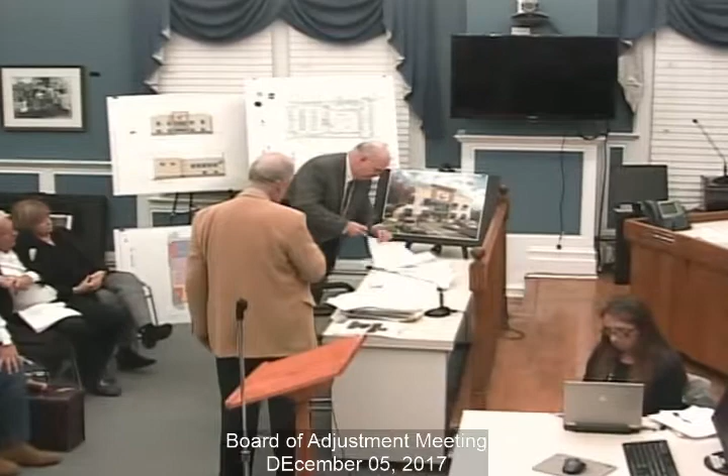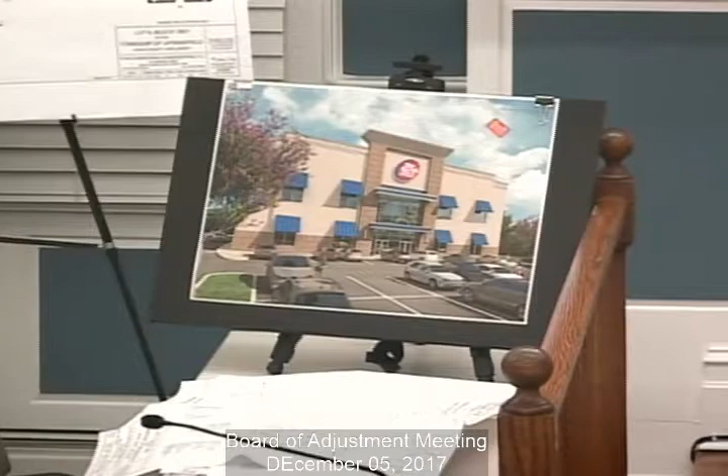The site was previously developed as a motel, and the motel's subsequently been razed, between the previous testimony at the other meetings. So those variances that were existing, there were several that were eliminated.

The variance that is required is lot coverage. It would be 88.3% proposed, where 70% is allowed. I think that was 60, based on testimony, Mr. Michaels, they changed that ordinance. Wasn't that 63%? I'm not quite sure. I believe that may have been, all right, but go ahead, continue.

And there's also a variance for building height that would be required. Okay, could you describe and explain the drainage for the site?

The site generally slopes in a southerly direction, and presently the flow from the site goes across the site and then drains onto the adjacent property on Lot 8. Lot 10 acts as a diversion that diverts the water onto Lot 8. And that general pattern would be maintained, and it would be enhanced through drainage pipes that are around the parking lot.

But the primary drainage is going to be through pervious pavement. This is a pavement that allows the stormwater to pass through the pavement into the soil, which is rather sandy. It's almost like there's nothing there, it just lets the water run right into the soil. The pervious pavement also filters out any particulate matter that gets washed into the parking lot, and then periodically the site would have to be vacuumed, which would remove the particulate matter from the site.

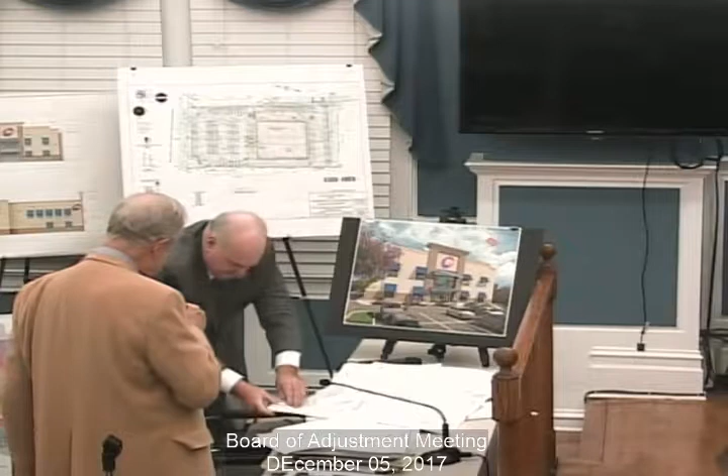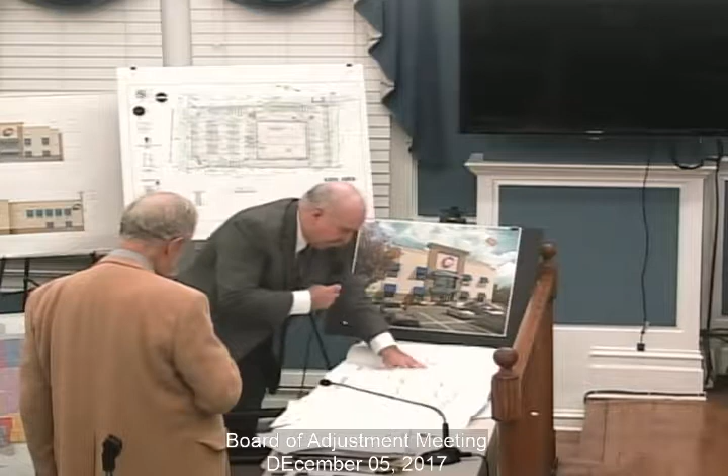The lighting and landscaping plans are sheet 5 of the plan sets. We're proposing 18-foot high LED lights throughout the parking lot. There's some quadruple lights near the first bay in the parking, which is near inlet 8 and near inlet 12.

And then there's also some other lights around the perimeter of the parking in the islands on the west and on the east. And there's additional lights around the perimeter of the parking to the back and around the sides.

The engineer or the planner, I'm not sure which, has asked for additional lighting west of the building in this driveway, and we agreed at the last meeting that we would do that. And they also asked for a shield on the lights adjacent to Route 22, and we've agreed to do that also.

Okay, and the circulation of the vehicles, I believe you already went through that? I did briefly, yes, sir. Do you have anything to add as far as circulation is concerned? No. Okay, how about... oh, they did ask for, in the comments, turning templates for fire access, and we agreed that we would do that and provide that. Very well, subsequently.

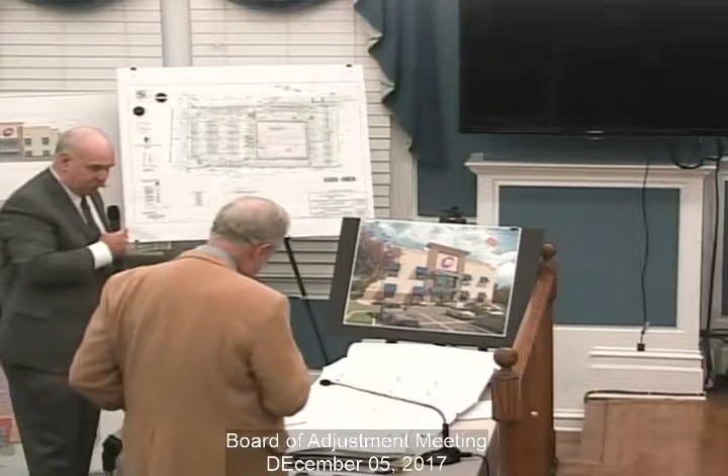Could you describe the proposed landscaping for the site? We're proposing some landscaping in the islands, which would be the dwarf junipers, and there would additionally be some dogwoods that we're proposing around the site, and we're also proposing some deer-resistant arborvitae along the back. There would be 9 Kousa dogwoods that we would be proposing around the site, 10 of the deer-resistant arborvitaes, and 80 dwarf junipers. Again, there was a comment asking us to provide some more landscaping, and we've agreed to do that.

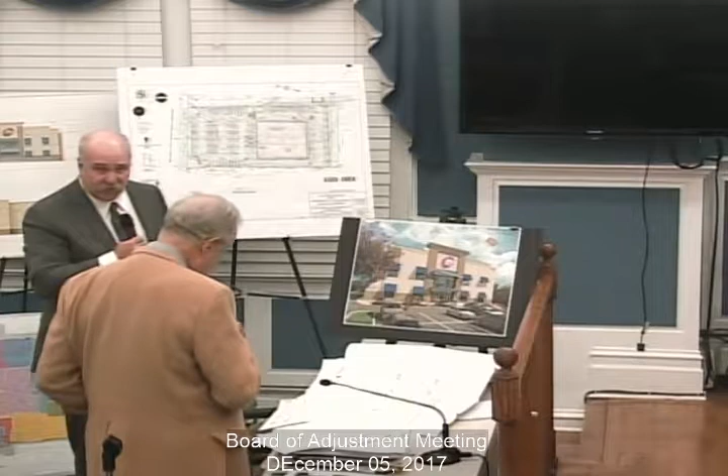Right, and could you describe the signage for the site? I think I'd like to defer that to the architect. Very well, the site sign. There's going to be directional signs around the property, and the one-way signs and the do not enter signs would be reversed to be appropriate with the new circulation pattern. Also, the traffic arrows would be altered to reflect the new traffic circulation pattern.

Do you have any additional comments you would like to add? No, I don't. That's the engineer's testimony, Mr. Chairman.

Okay, yes. Okay, that's fine. Does anybody have any questions for the engineer?

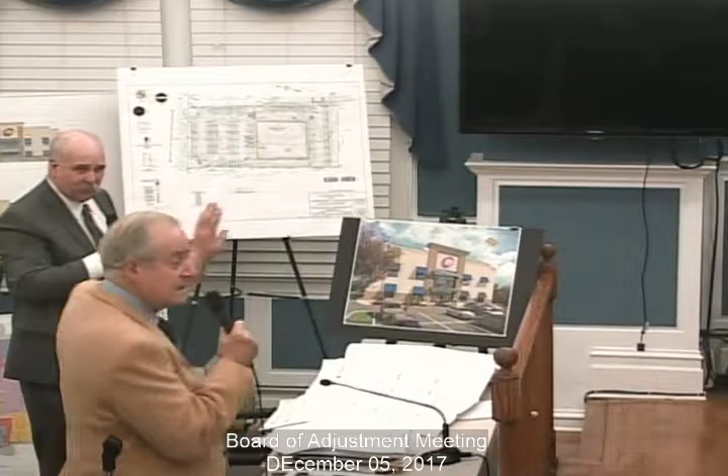I just have a technical question for our board attorney. When we've granted a variance for Lot 9 based on certain parking, as part of this application, are we able to change the parking by eliminating parking spots? How does that work? Mr. Hochstein: that's Lot 8, not Lot 9, the adjacent property. I did file an application for amended preliminary and final site plan application to take care of the changes. That will include that. Anything else?

Maybe. Are there any other questions from the board for the engineer? We're going to reserve the opportunity for anybody in the audience to speak after we've heard all testimony. Okay, so we can continue.

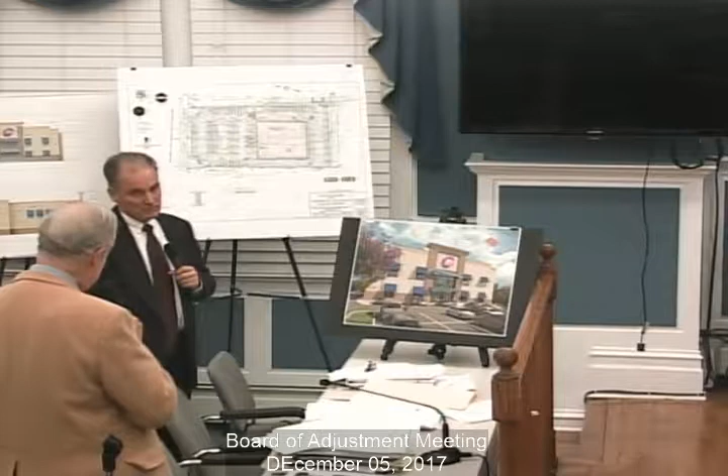All right, my next witness will be Mr. Weimer. Mr. Weimer, you're a licensed architect of the state of New Jersey, and your license is currently in full force and effect. Is that correct? That's correct. Could you give us a brief resume of your educational background and work history?

I have a Bachelor's of Architecture from Virginia Tech. I have been licensed to practice architecture since 1986. I am the principal of the Architects Alliance, an architectural firm practicing in Newark. I have been the principal of that firm or its predecessor since 1988. And you've testified before this board before, have you not? I have. I would ask the board to accept his qualifications as an expert witness in the field of architecture. He's accepted.

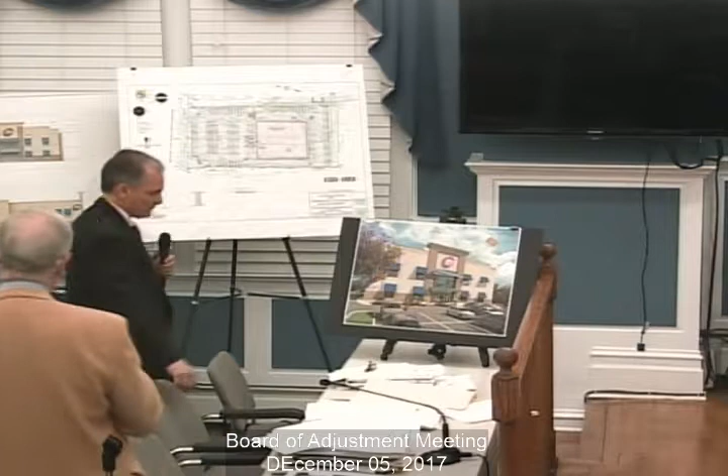Mr. Weimer, we've marked as exhibits A2 through A7, dated today, various exhibits that you had previously referred to. Could you go through them and briefly tell us what they are and what variances are required, insofar as your knowledge is concerned? Sure, shall I go one at a time? Yes, one at a time. Exhibit A2 is a three-dimensional perspective rendering of the front elevation of the building.

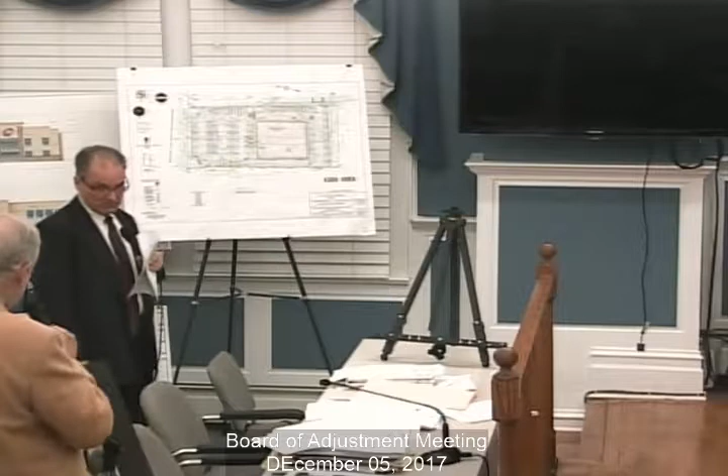May I have it? These elevations or exhibits showing the 24-hour fitness logo are from prototypes you received from 24-Hour Fitness, showing what type of building they wanted on the location. That is correct. This is A2, if you'd like to pass it around. I'll hold it. Everybody see it? Anybody want to take a closer look? I'll pass it to you. Nope, that's good. Okay, go ahead.

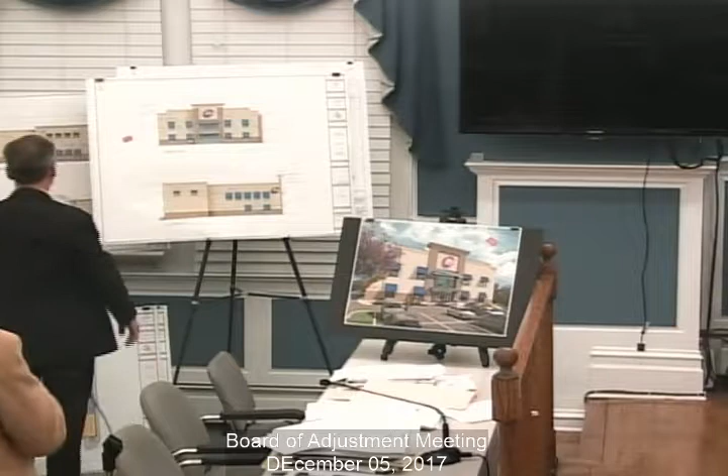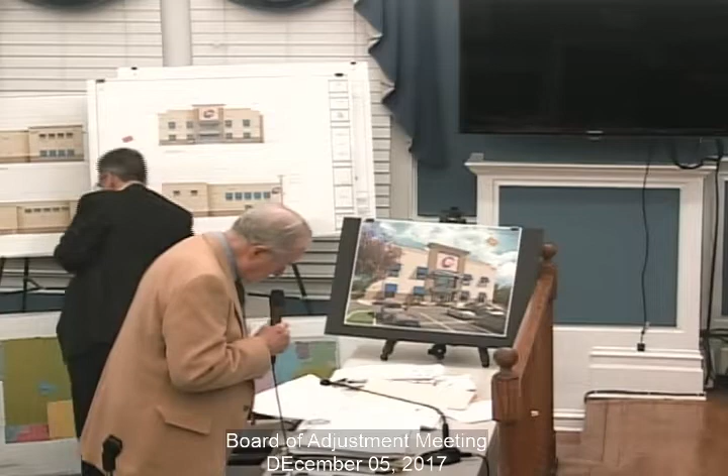Exhibit A3 is an elevation drawing, the north and east elevation of the building rendered in color. Exhibit A4, the south and west elevations of the building rendered in color. Exhibit A5, the first floor plan rendered in color. Exhibit A6, the second floor plan rendered in color. Exhibit A7, an exhibit provided by 24-Hour Fitness, illustrating actual photographs from some of their recently constructed facilities.

All right, before we proceed, I just want to confirm, I don't think we did this, Mr. Titus: this property is located in an HC zone, is that correct? That's correct. Getting to some of the variances required for this application, a use variance for the roof height of the building. In the HC zone, permitted is 40 feet, proposed is 45.6 feet. Could you explain that particular variance?

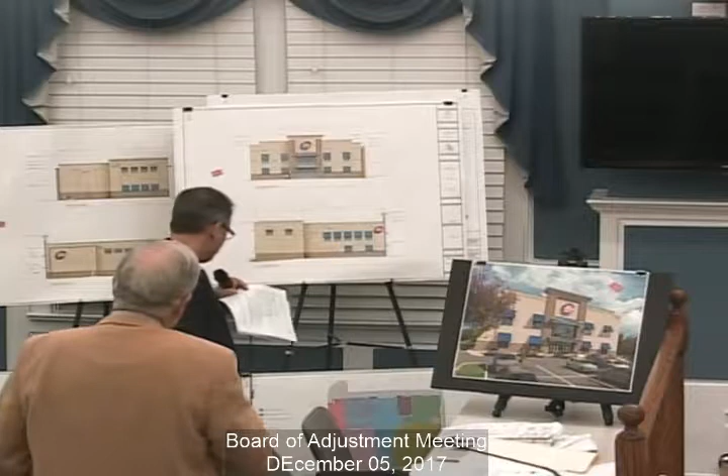We're requesting a D variance based on the height of the structure. The height of the roof is measured based on the highest roof, which is over the basketball court at the second floor, measuring 44 feet 4 inches above the finished floor, or 45'6" above average grade. Since average grade slopes from front to back on the property, we would lose about 1'2", increasing the actual height of the building as referenced from average grade by about 1'2".

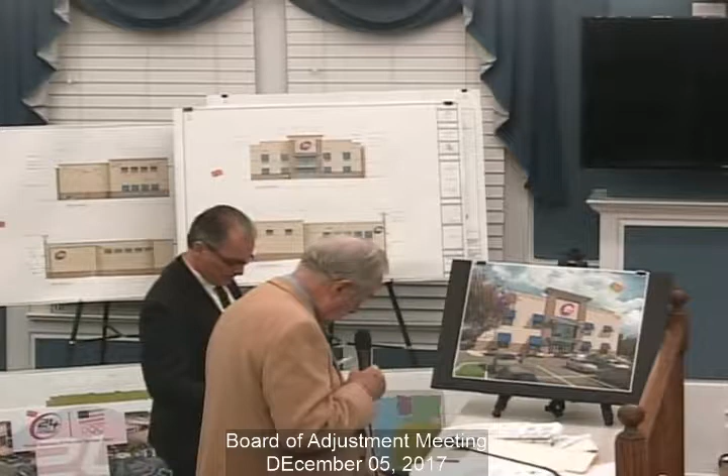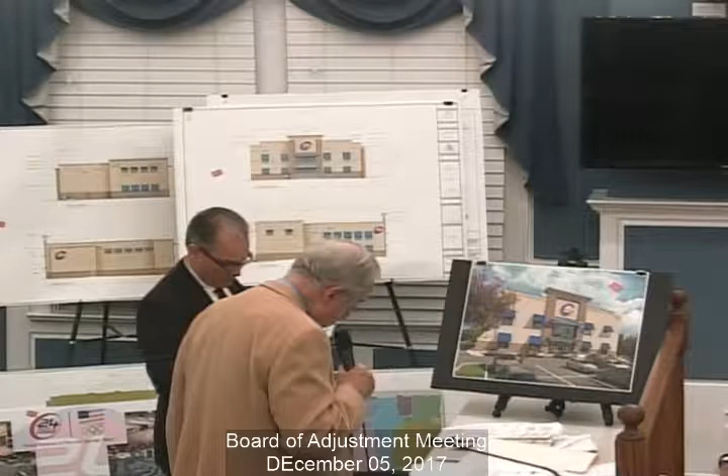We have the cornice of the building, which is relatively steep and tall, but it's stepped. In effect, the tallest part is a center marquee at the front facade, which measures 58'4", and it steps down to heights of 51 feet, 46'6", and 41'6". The actual roof height is closer to being in conformance with the ordinance. Essentially, the ordinance allows us 40 feet for the roof and an additional 4 feet for the parapet height. The heights we present are greater than 10%, or 10 feet above the maximum height permitted in that zone, and therefore we're requesting a variance.

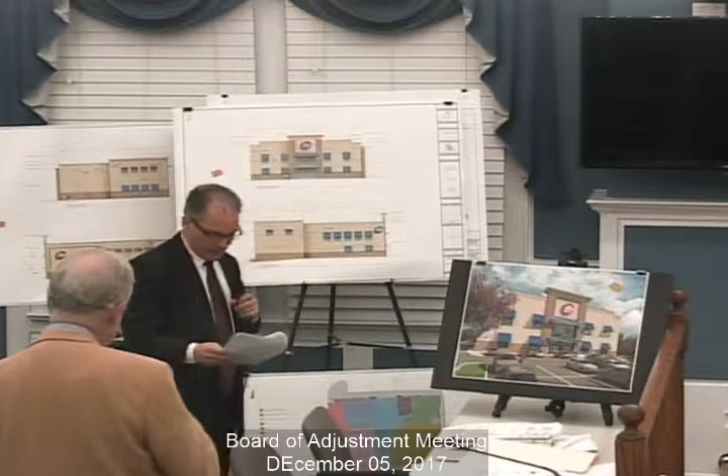What about the parapet walls? The parapet walls allowed are 4 feet; ours are greater than 4 feet. You testified that the tallest one is 58.4 feet, and then they step down, is that correct? That is correct. One reason for a parapet wall above 4 feet high at the roof line was to shield the heating and ventilating systems on the roof. Based on their prototype, we anticipate a series of air handling units up on the roof, as well as a very large dehumidification system for their pool.

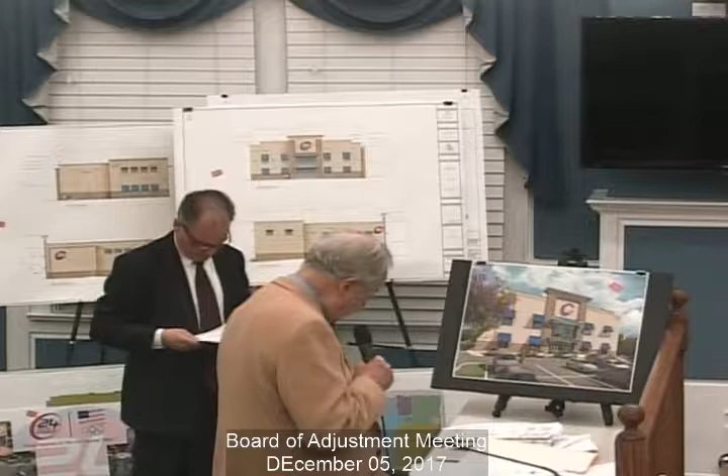They also typically run ductwork across the roof, so the parapet walls help to shield some of the mechanical units from view. And the freestanding sign within the Route 22 setback, the height permitted is 22 feet.

Ours is proposed to be 27 feet. Could you discuss that for a couple of minutes? Yes, if we want to look at, let's see.

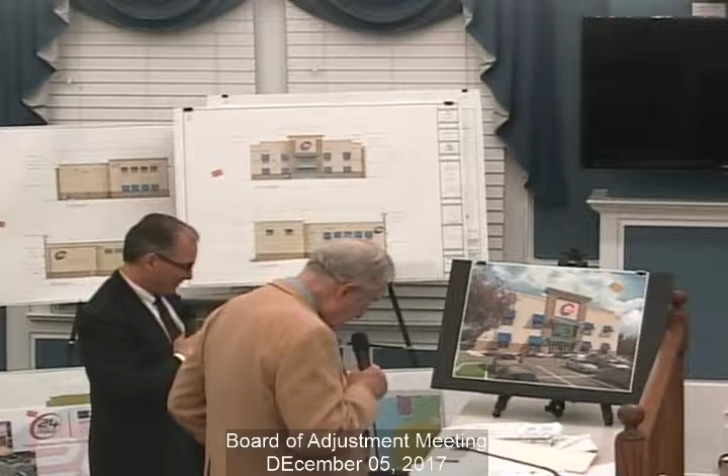I guess we don't have that illustrated. It's on our drawings, but not illustrated in color. Our pylon sign is proposed to match corporate standards, which would be a 14 by 14 sign, proposed to be 27 feet in height. The maximum sign area permitted under our ordinance is 75 feet. We are requesting a sign area of 196 feet.

And how would those two requests for the sign area and the sign height compare with existing signs? If I may, I'd like to enter another exhibit, which are photographs that I took of the signs at the existing 24-Hour Fitness and at the Colonial Motel, which is the site we're proposing to develop.

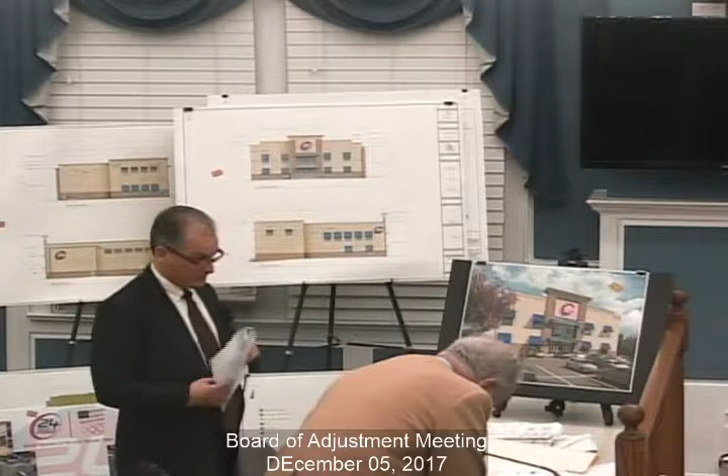Yes. I'd like to ask you some questions about the photographs. You said you took them. When did you take them? Photograph taken on October 12th, 2017. Have they been altered in any way? No. And do they depict the current conditions of the signs? Yes, they do.

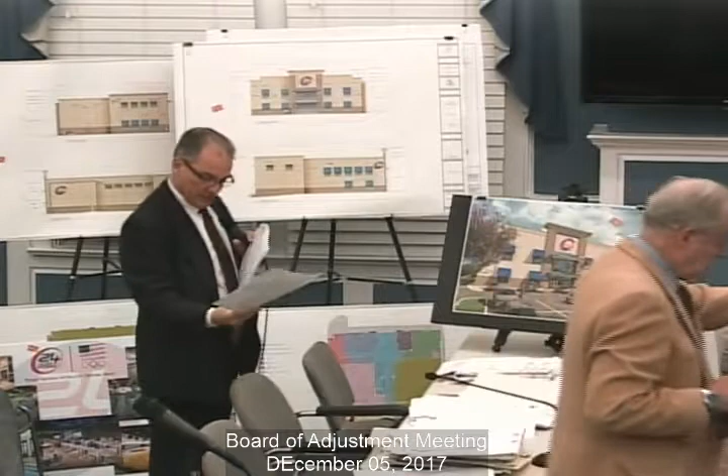The sign at the Colonial Motel, we'll see first. Now that's the site that we are developing. That is a series of two signs and a base. The upper sign panel is 21 feet wide by 11 feet tall. The lower sign panel, 12.5 feet wide by 3.5 feet tall, combined for a sign area of 275 feet.

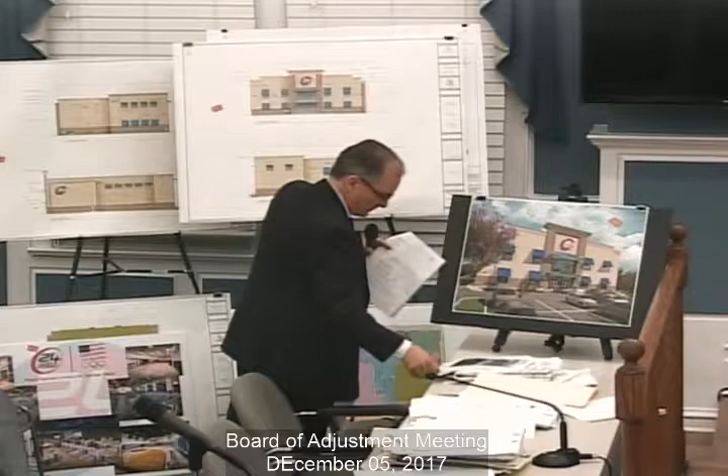If we look at the sign that exists now at 24-Hour Fitness, it's a simple, single monopole pylon sign. That sign panel measures 21 feet wide by 10 feet tall. It has a sign area of 210 feet. It's a double-sided, internally illuminated sign. If we compare that, both signs are considerably larger than what we're proposing. Again, we're proposing slightly under 200 feet of sign area, with sizes of approximately 14 by 14.

Now, how about the wall signs? One wall sign is allowed, we propose 3 wall signs. Height of the wall signs allowed is 5 feet, proposed 2 at 12 feet high and 1 at 10 feet high. That's correct.

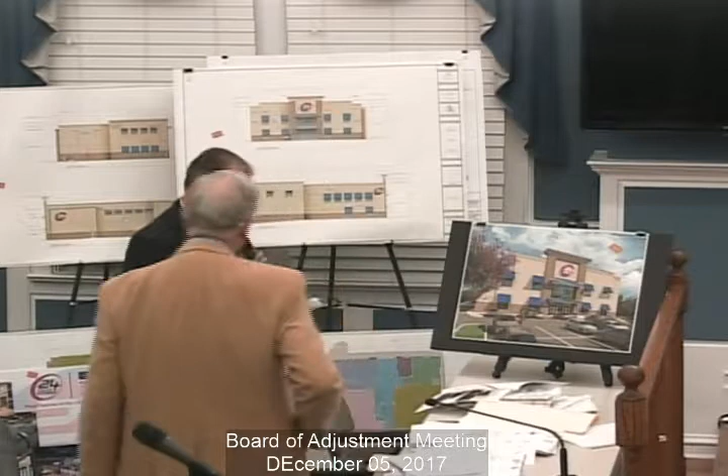Along Route 22, their corporate logo is an oval sign, approximately 160 square feet, 12 feet high by approximately 13'4" wide. Same sign, very similar, would be on the side of the building facing west, and a slightly smaller sign on the east-facing facade.

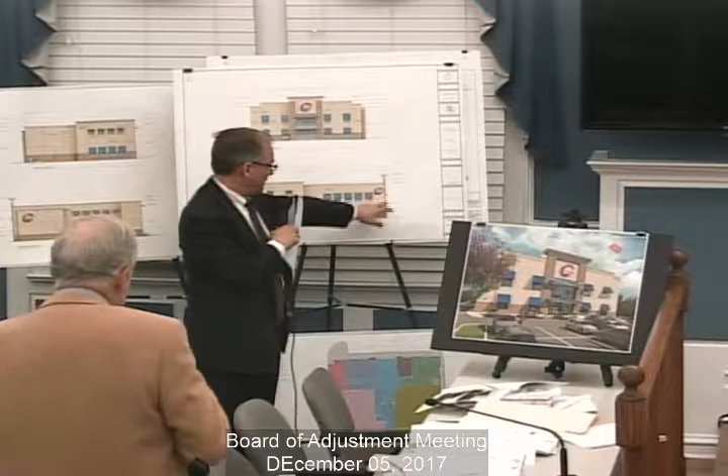How far is this building set back from Route 22? The building sets back approximately 200 feet from the roadway. We'd like to enhance the signage just for visibility. Okay.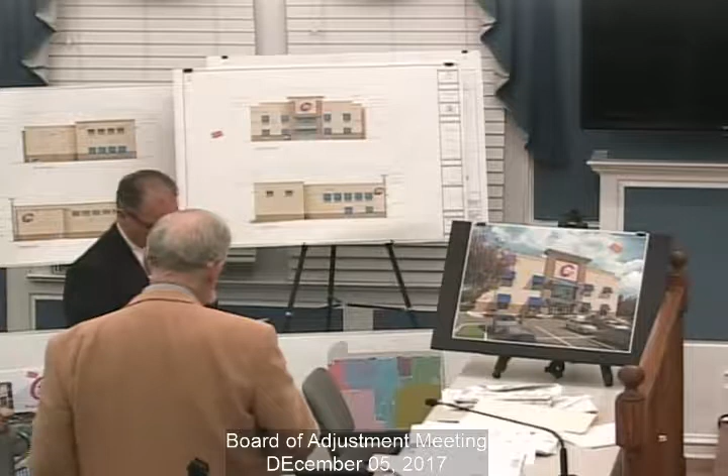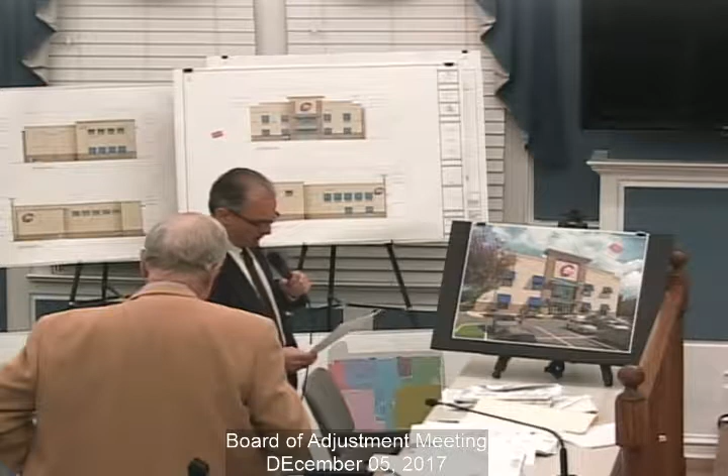Is there any other information you'd like to supply the board at this time? No, I think at this point, other than we'll acknowledge on the record that we have received the correspondence from Robert Michaels, the township planner, dated 9/15/17, and the correspondence from Keller and Kirkpatrick, dated September 13th, 2017. Very well. I have no further questions of this witness.

I guess it was our September meeting, we were talking about the sign, and I'm looking at the architectural plan. It says sheet A1, dated August 31st of this year, and it's signed by, I think that's your signature, on September 8th of this year. This is the particular picture, number 4. How did we go from that to this?

And in addition to that, I thought at the September meeting, since these are very cumbersome, that this was gonna be eliminated and it was gonna be that.

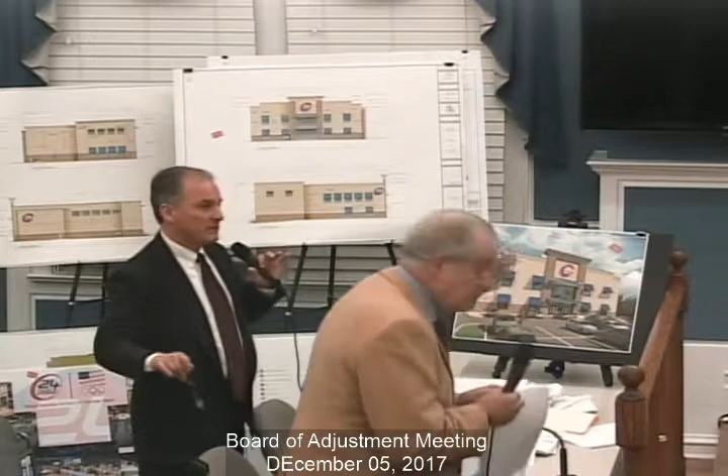Okay, just for clarification, we're not proposing any change in the signage. The sign that's represented in that last exhibit is the existing sign at the 24-Hour Fitness, which is on the adjacent parcel. It is not what we're proposing to build.

The testimony is there's the 14 by 14 sign that we will build. Yes, I remember in that meeting that I had asked, and you said you were gonna find out what the sign area would be if in fact we eliminated the border from that sign. Exactly.

So, 96 feet is what it would be. The testimony I'm attempting to present tonight is that we are smaller in size than both the existing sign on the site and the existing sign on the adjacent site, which is intended for the same use. We'd prefer to keep the rectangular sign only because it's simpler to build and it's the corporate standard. At your request, we did look at that, and that same 14 by 14 sign, the logo area alone, would be 96 square feet.

Mr. Chairman, this is the existing sign on 24-Hour Fitness, that's page 2 of 8. That's the sign on the current property. Right, on the property next door. So you want to use the same sign? No, no, no, we do not. We're just presenting it. You want to take this sign down? Well, it's not our property. When the building is built...

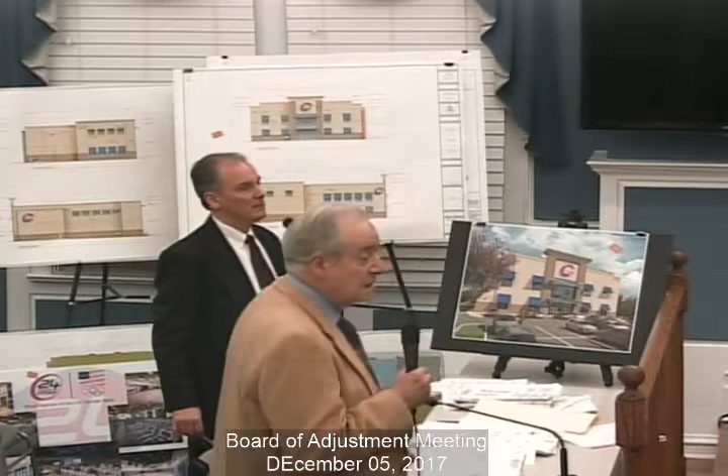Is this the sign that you're proposing? Yes, it is. What is the square footage of that sign again? 196 square feet, and by eliminating the area around it, 96. What is our ordinance? 75 is your ordinance.

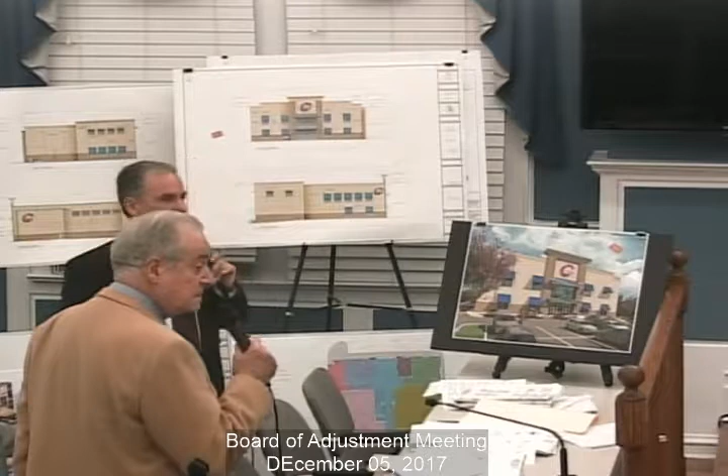Okay, so it's a lot closer to that. How far is the building off the road? Approximately 200 feet back. If it's 200 feet or so off the road, a sign on the side of the building, what's the visibility of that really? What's the purpose of that? Again, you don't ever see these buildings head-on.

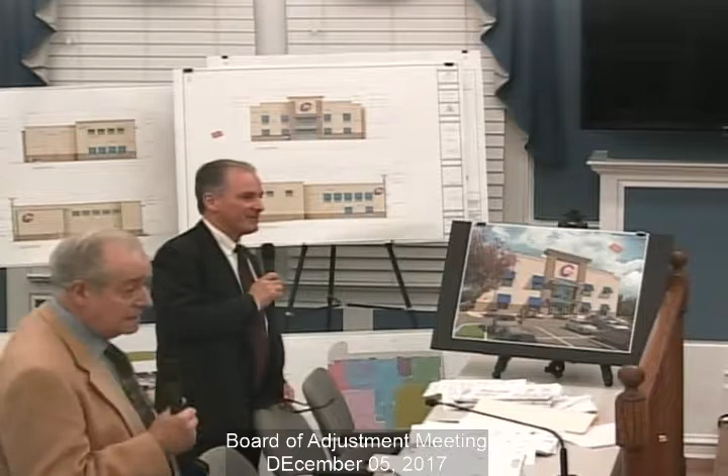Will you see it? You'll certainly see it from adjacent parcels. If you're shopping across the street, would you see it maybe at 65 miles an hour as you drive down the highway? Maybe not, but I think Mr. Gagliotti, who owns several properties in the location, may be able to tell us a little about that, if we could just ask him.

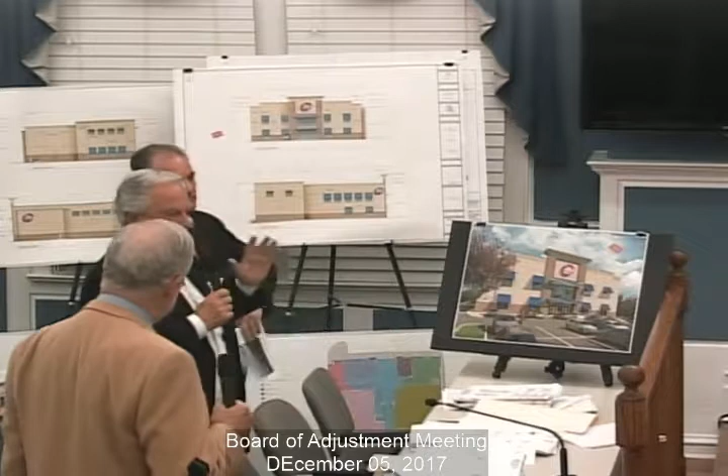Yeah, right now we have a building where we have Sky Zone on the adjacent property, and we have a similar situation where you have signs at the top of the building. If you go down Route 22 headed westbound, it stands out right through the trees. You could see the Sky Zone sign basically without even seeing the pylon sign, you could see the building sign. That building is set back more than 200 feet.

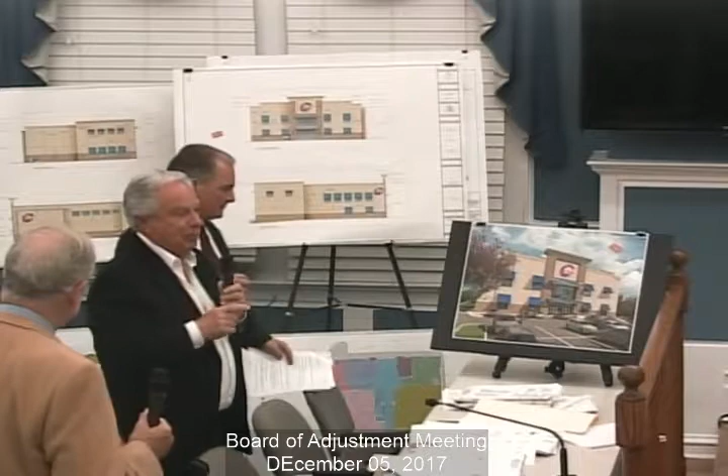So with the side signs, they're really important. They don't sound that way, but trust me, they're super important. When you're westbound and your eye glances over to the eastbound side, sometimes you miss the pylon but you see those side signs. We try to locate them on most of our buildings. If you see PM Pediatrics up the road a little ways, we have the same condition where we have a side sign, and that sign is more visible than the pylon sign. So most of the properties where we can expose a sign to the side of the building, we try to do so because it's pretty effective when you're headed in the opposite direction.

Bear in mind also that we're requesting a building which is slightly taller than most buildings adjacent to it, and certainly taller than the building east of it, where Kinko's is located. So we will be able to see signs over the top of the building from a distance.

Any other questions from anybody on the board?

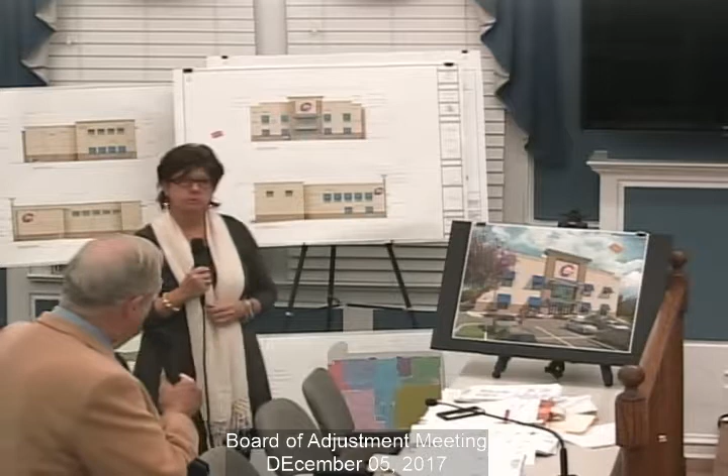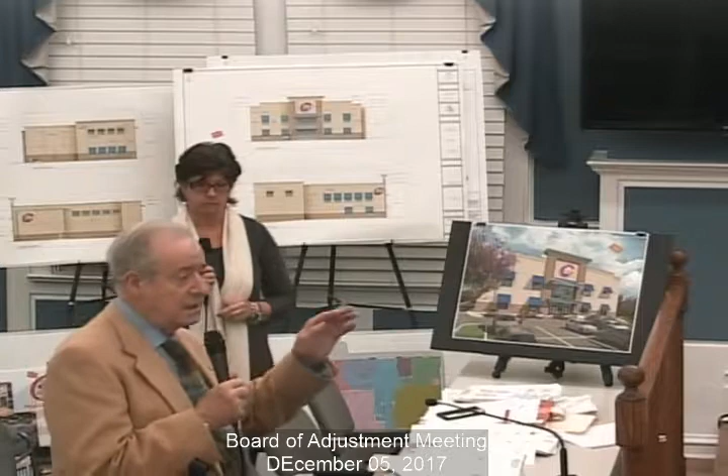Okay, Elizabeth Dolan will be my next witness. And just before Ms. Dolan starts, I wanted to advise the board that on the adjacent Lot 8, the original approval was for 244 parking spaces. When we came in with an amendment to demolish the rear building, we picked up 2 spaces, so that became 246 spaces. With this application, we're asking the board to accept the removal of 4 spaces to have the cross-access aisle, which would make 242 spaces. In reality, it's 2 spaces less than what was originally approved.

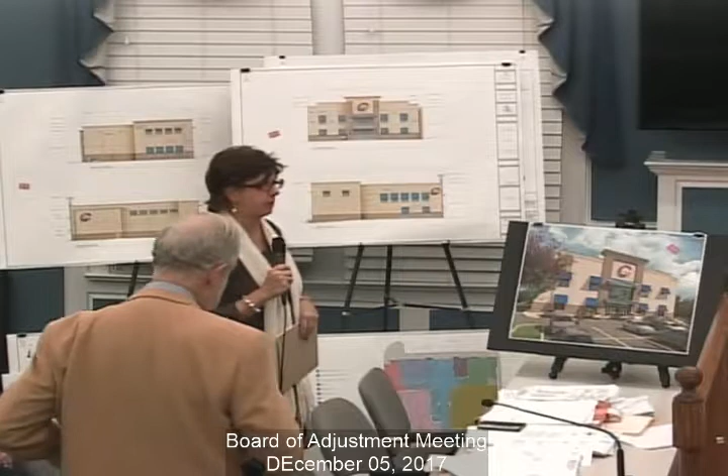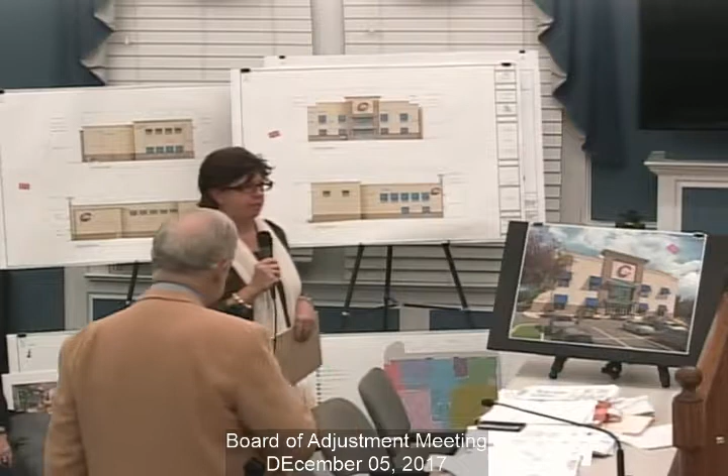I've presented testimony in over 250 municipalities. I have been here, but it's been a few years. In all cases, I have been accepted as an expert in traffic engineering, and I've also had the opportunity to review traffic, parking, and DOT aspects of land use applications for many boards throughout New Jersey. I would ask that the board accept Ms. Dolan's qualifications as a licensed civil engineer specializing in transportation engineering. Yes, we'll accept her credentials.

Thank you, Ms. Dolan, you're familiar with this application? Yes. And you're familiar with the cross-access agreement between Lot 6 and Lot 8? Yes. Could you tell us what your opinion is as far as the parking for this site and the cross-parking agreement is concerned? Certainly, the cross-access and cross-parking easement is beneficial from a traffic engineering perspective and from a site circulation perspective.

The combination of uses that we have now work very well together in terms of people coming for one-stop shopping. If for example the parents are dropping the kids at the Sky Zone, they may also grab a bite to eat. Instead of having to go back out on 22 and then into the adjoining property, we have this cross-access that allows ease of circulation between the different users on lots 6, 7, and 8.

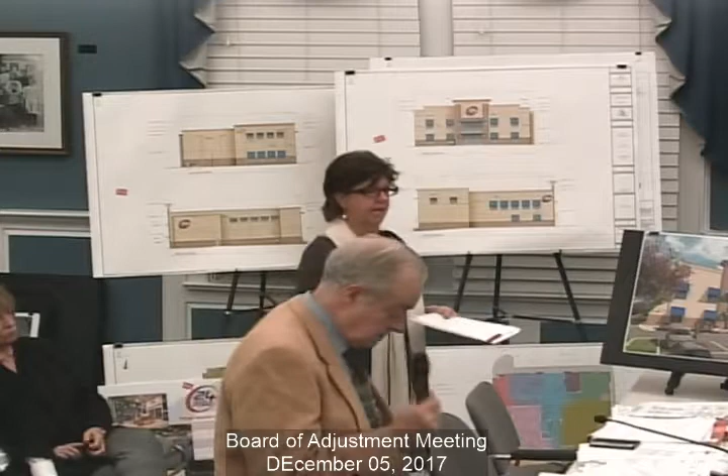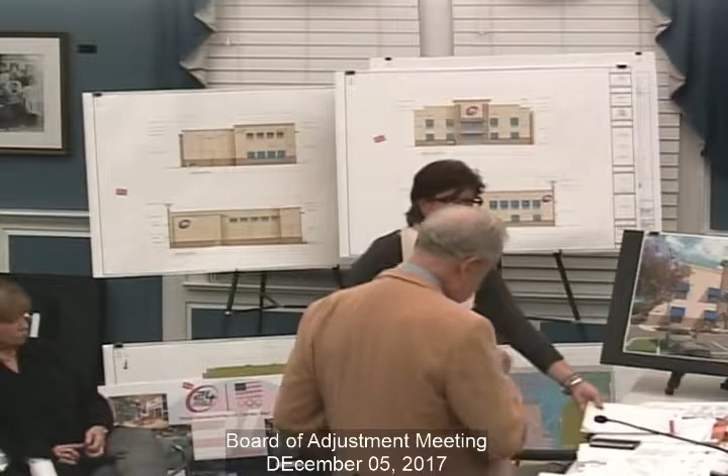From a parking perspective, the evolution of Lot 8 is this Sky Zone, which is a little bit different type of land use and doesn't have quite the parking demand that a typical retail use would have. There was a study by McDonough & Rea, another traffic engineering consulting firm in New Jersey. The ratio is about 2 spaces per 1,000 square feet for Sky Zone versus 4 per 1,000 for retail. So right away that brings down the parking need for Sky Zone, and also that peaks on weekends, typically Friday nights after 7, 8 o'clock, and Saturday afternoons.

The proposed, it's just under 39,000 square foot health club requires 254 spaces. We've got 135 proposed on the subject property. Immediately adjacent and with the cross-access connection is the parking on what would be essentially the rear side of the building on Lot 8, and that's the Sky Zone and the daycare building. The main entrances for those uses are actually on the east side of that building on Lot 8. So the loading and overflow parking is immediately adjacent to the proposed health club, and there's 74 spaces there to accommodate what would be required by variance.

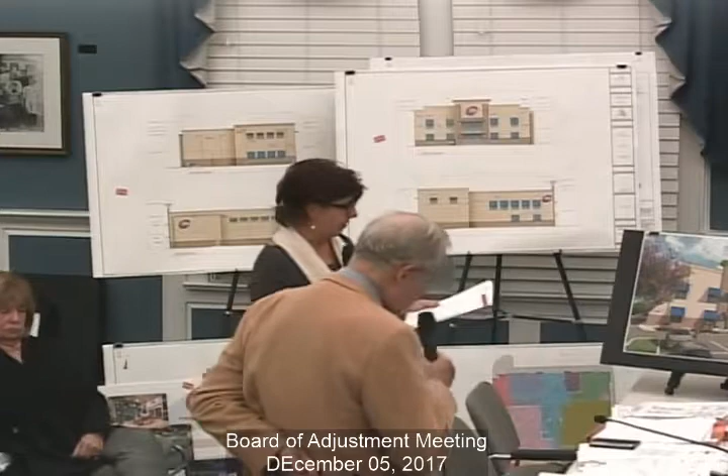So the health club requires 254 spaces. We have 135 on site, and that's a deficit of about 119. If you look at some of the numbers published by the Institute of Transportation Engineers, they would say the health club really only needs about 200. That brings the deficit down to 65. And as I said, right across the property line there are 74 spaces readily accessible and within reasonable walking distance to support any additional demand that the health club may have.

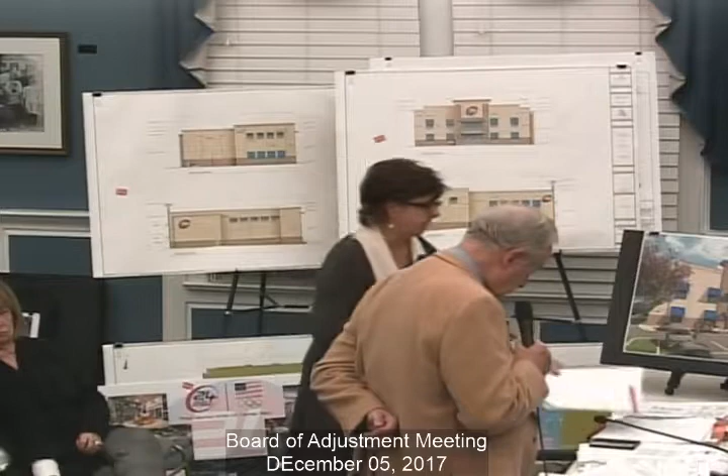So it's a good combination of uses from a shared parking concept, because Sky Zone is reaching its maximum demand Friday night and midday Saturday. The health club demand is maximized on evenings 7, 8 o'clock. So the opportunity to share parking works with these uses because they're not generating maximum demand at the same time of the day or during the week.

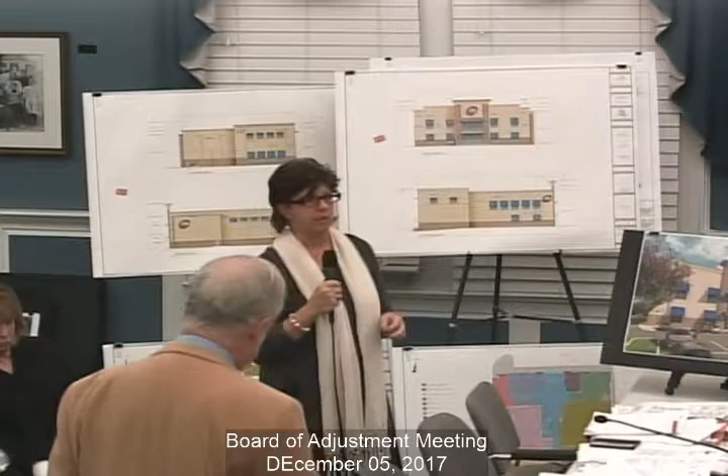Do you have anything else to add? DOT, we talked about earlier. We are not proposing any physical modifications to the driveways, so we should not have to obtain an access permit. We are also providing, through this cross-access, the ability to get out to Diamond Road. So that's considered alternative access, and it's a plus from DOT's perspective. Sharing the parking and not forcing the traffic back out onto 22, all of those things are favorable from NJDOT's perspective. I agree with your engineer that we can get confirmation that a permit is not required for what we are proposing, which is essentially the same access configuration as exists at that small retail center with the Blinds To Go and Kinko's right adjacent to us.

I think that's lot 7. I have no further questions.

Earlier, the objector talked about changing the egress, the entrances, swapping them back and forth. And we were told that has to go through DOT and so forth. You want to comment on that?

The driveways, I believe, have historically been two-way driveways. What we're proposing is that the entrance be at the eastern driveway, and that the exit be at the western driveway. So as related to the next door neighbor's concerns, that pushes the entrance movement further away from their access and pretty much assures there won't be any impact to their driveway operation. We're not proposing any physical changes, but we will have to take it to DOT for confirmation that no new permit is required.

Can I ask a question regarding that? Since you're the traffic expert, when somebody's coming out at the same time that somebody's slowing down to come in, is that less safe?

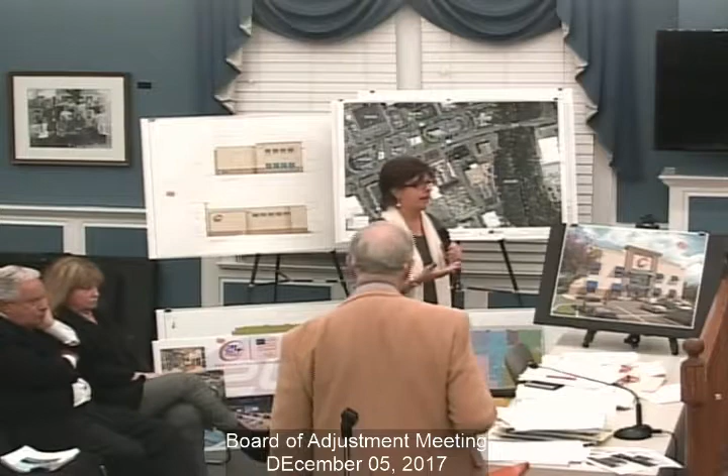And at that time, the Kitty Academy is closed, so there's no parking demand there. The parking demands typically on Saturday or Sunday at the health club are not quite as high as they are on weekday evenings. But again, there's those 74 spaces on the Sky Zone/Kitty Academy side of the building, the delivery side, whereas the main entrances are on the other side, the east side of the Sky Zone building.

Mr. Chairman? If you went right in back at Kinko's, that would be in the back of the Sky Zone building. You'd have to go all the way around, and it's a big building, all the way to the front where their main entrance is.

My understanding on the Lot 8 site is that you needed a variance, that the total required was 354 and you're at 251. That is because this ordinance, the Springfield ordinance, takes each use and provides a separate parking requirement for each use. Mr. Dean testified that according to the Institute for Transportation Engineers, and your ordinance defines a shopping center, if it defines a shopping center, which would be Lot 8, it complies with your definition of a shopping center. If you give me a moment, I have that definition here.

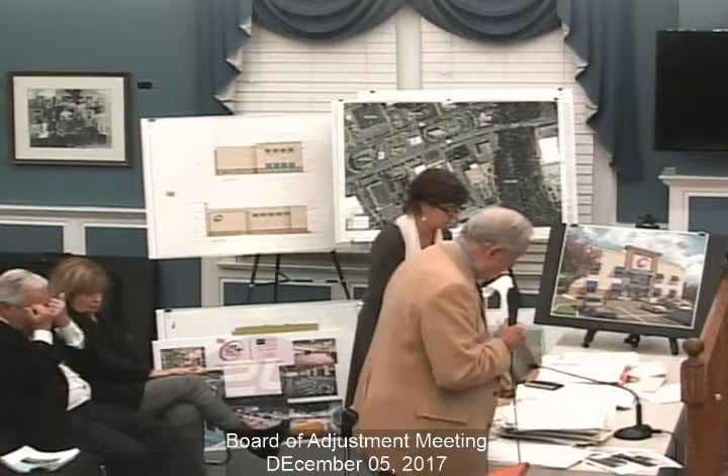That requirement is 4 spaces per 1,000 square feet, and he said that is based on the information from the Institute of Transportation Engineers, and he felt that the definition of parking as a shopping center was more in line with the use being made of the property, and therefore the ordinance in Springfield, although requiring separate parking for each unit, was really sort of misguided.

I don't disagree with that, but the board, it was a variance that you requested, the board granted the variance. Yes. But it was a variance of about 100 spaces deficient. Well, it was deficient if you use your ordinance's definition of parking for each individual use, but if you use Mr. Dean's definition of a shopping center and parking required for the shopping center, we had a surplus.

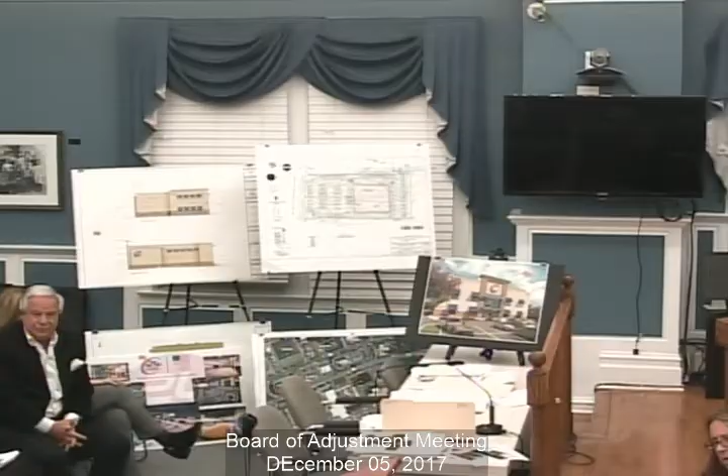We brought up, and Mr. Michaels as well, that lighting and landscaping needed to be augmented. Then we had some comments on the drainage. So nothing really in addition to what we had in our letter.

Does our planner have any comments right now? Just a couple minor ones. My name is Victor Vinegar, I'm filling in for Bob Michaels tonight. Just a question quickly with Betsy Dolan.

Right now the applicant is proposing the pylon sign there, but if we're going to do ingress at that driveway and egress at that driveway, would it be better off to have this pylon sign move closer to the ingress driveway? Might be. I think that's probably a good move. Yeah, because they do that now at Autoland - I use Autoland, and that identifies the driveway because they have ingress and egress in a similar fashion to what they're proposing here. I think for identification and safety, it's better to move the pylon sign closer to the actual physical driveway.

I agree with that also because it'll give it better visibility to the east, moving it away from the clutter that's to the west. I think that's a good idea.

Art would work with the site engineer to make a monument sign here saying exit only, identified via monument sign, and another monument sign there saying entrance only, besides the pylon sign. I just wanted to get clarification on that.

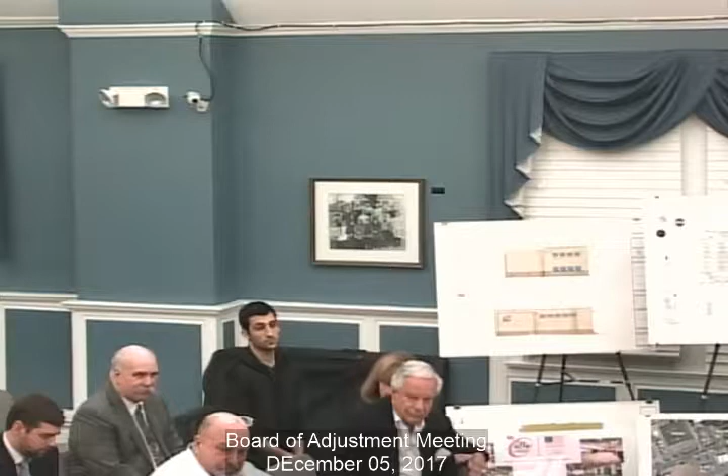There's some gaps in the lighting, less than half a foot candle in these areas, especially by the front entrance to the building. So I think working with the architect, if they do sconces on the building or something else, to add more lighting at the entrance to build up the foot candles, because there's some gaps there.

But the site engineer has already agreed to add to the lighting to offset some of the gaps and to add additional landscaping to the plan. So that's about it. Maybe if the site engineer raises the poles a little bit, instead of 18 to maybe 20 to 22 feet, you might get better coverage.

And I have no problem with that. Is there no problem with that? Oh, you have an ordinance on that? Yeah, I think the height. I believe the height has a limit. Oh okay, sorry, yeah.

But are the lights that you're proposing, the new ones that are going straight down, more than the ones that go sideways? Like the LED, so a couple feet might not really matter that much on the spread, it would matter on the height.

The client would like it, I like it, the planner would like it, but that would be another variance. I have no problem increasing it to 22 feet or so. Not sure if you want to entertain that, I'll leave it to you.

At some point, because you've got a visible site, if you start allowing that variance at 22, you're going to open it up to other sites. If you need another sign, you need another light, I think at the end of the day, okay, yeah, I'll retract that statement.

I have a question. What is the specific use category of the Sky Zone? What is that considered, is it retail, is it entertainment? I'm not sure what it really is. There's a lot you could question, a lot you could throw into that. Sky Zone is an assembly use by the building code, but by the ordinance, it's considered retail.

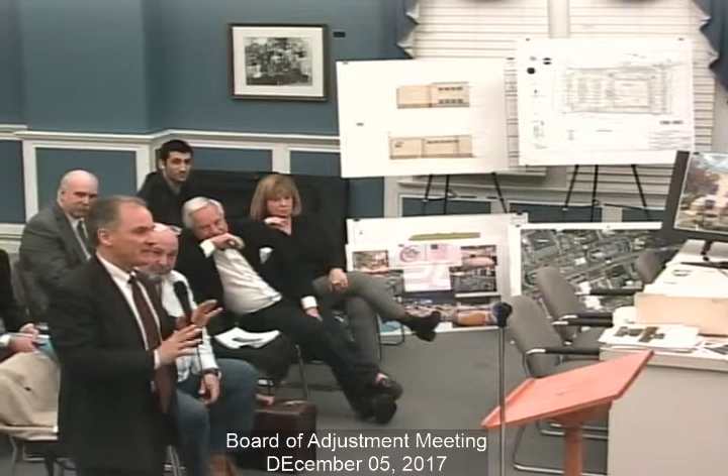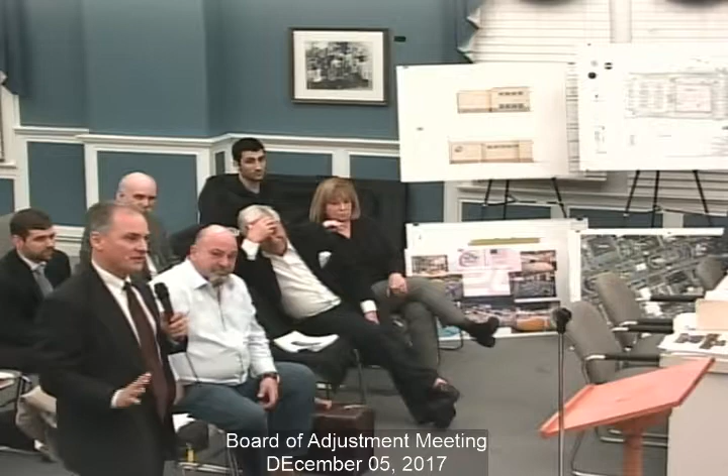If you visit the site, you'll get a better picture of some of the frustration we're feeling on our end. The building for Sky Zone and Kitty Academy is probably 500 to 600 feet long. There's no way to get from the eastbound side to the westbound side without walking around the building. In fact, Kitty Academy fences off their playground with alarmed panic bars on their fences, so even their staff is forced to walk around the building. So the parking spaces in the rear become almost unused. You literally have a city block to walk to get to the eastbound side of the parking, so the 78 spaces will be grossly underutilized at that site.

I think the overflow becomes welcome. Otherwise, we're going to see those spaces unused.

May I continue? Yes, sir. I'd just like to call Mr. Gagliotti to testify briefly.

Mr. Gagliotti, you own various properties along Route 22 in Springfield, do you not? Yes, we do. Could you tell us about the parking at some of those other properties you own? A typical example is the Olive Garden complex, if you're familiar with that, where we have Pier 1 and those stores. Now, we met the ordinance that exists today with the parking requirement.

Now, if you go in the back parking lot, we have maybe 200 parking spaces with grass growing through them. In fact, we're going to try to go back and do an amended application to build something back there. They're useless. All we do is snowplow them, because the retail, combined with all the uses, never utilizes the amount of parking we have there. It's just wasted.

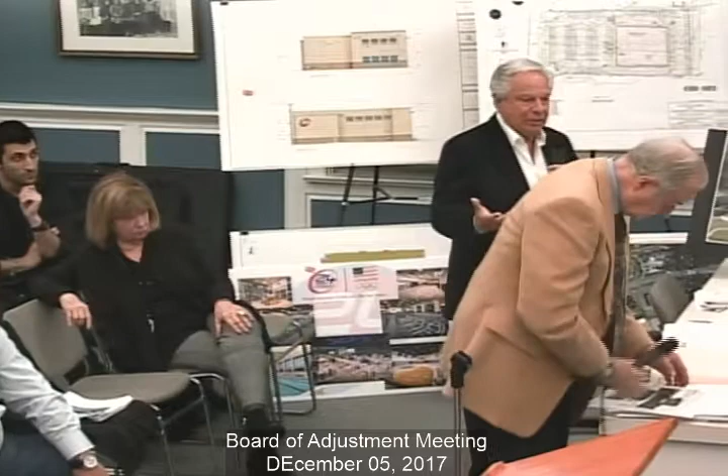And the area that's fenced off, which he's talking about—right from day one I talked to the engineer and said these guys are nuts for not having an entrance from the back side of the building, because nobody's ever going to use that parking lot. Nobody's going to walk all the way around the Sky Zone and park in the back. The majority of it's going to be parking to the front and to the side.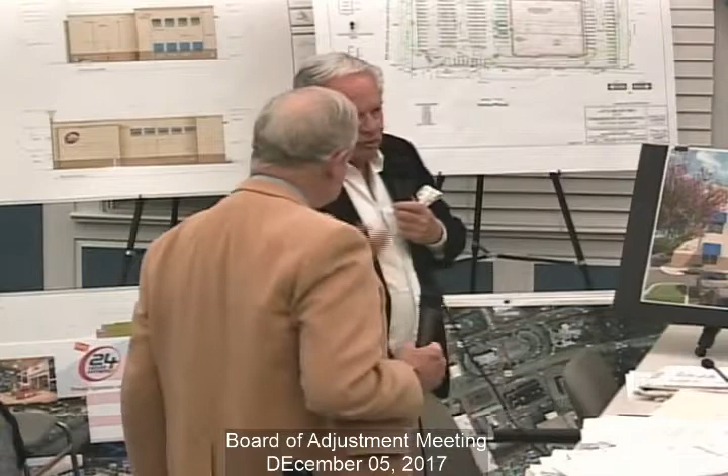So the overflow parking—it almost was perfect for this use that we're putting into it. I have no further questions.

Anybody have any questions? At this time, I'd like to call Mr. Block, who is our planner.

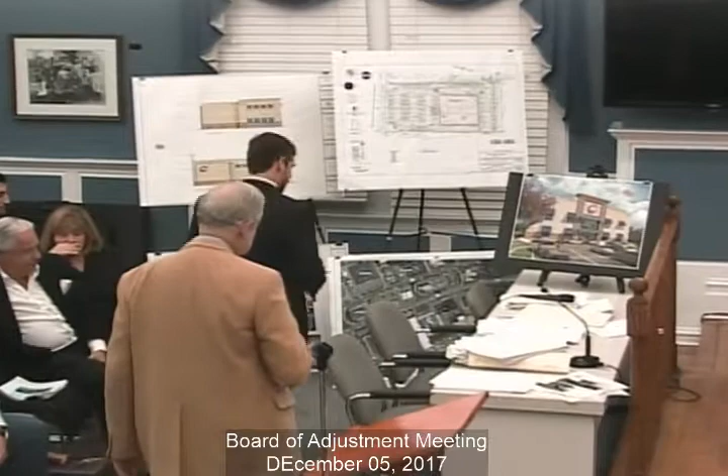Mr. Block, you're a licensed planner of the state of New Jersey, and your license is in full force and effect? Yes. Could you give us a brief history of your educational background and your work history?

Yes, I have a bachelor's degree from the University of Buffalo in the field of planning. I'm a licensed professional planner in New Jersey and a certified member of the American Institute of Certified Planners, accepted as an expert witness across New Jersey zoning and planning boards, both as the board's planner and as the applicant's planner.

I would ask that the board, if they have no questions, accept Mr. Block as an expert witness.

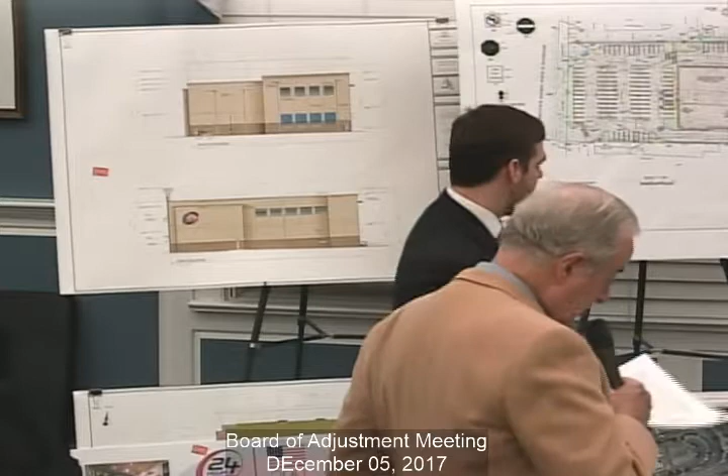Are you familiar with the application? Yes, I've reviewed the application, all of the plans and documents that were submitted, and the exhibits that have been presented.

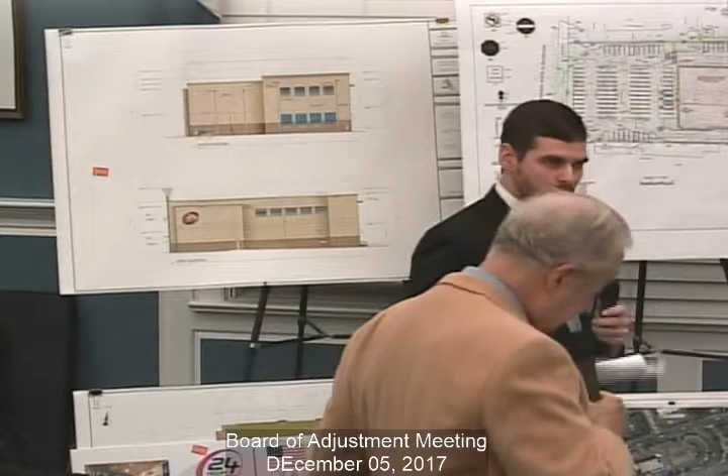And you're familiar with the zoning for the site and the various variances requested? Yes, I've reviewed the zoning ordinance and the master plan documents for the town. The property is located in the HC Highway Commercial District, which runs the entire length of Route 22. Principal permitted uses in the HC zone include a variety of commercial uses, including retail sales and service stores and shops, business and professional offices, banks and financial institutions, wholesale businesses, medical offices, etc.

So it's a very active commercial corridor along Route 22.

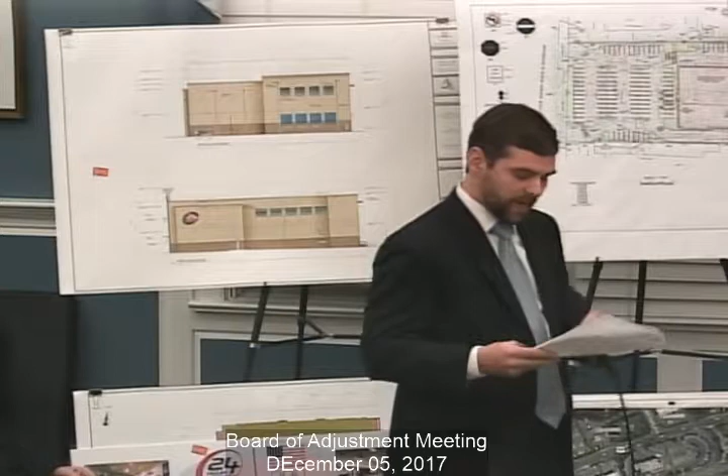Do you have an opinion regarding this application? Yes, we're seeking site plan approval along with one D variance and several C variances. The D variance is for the height of the building. The maximum height allowed in the HC zone is 40 feet, and the proposed building is 45.6 feet above average grade to the rooftop, which is greater than 10% of the permitted height, so therefore a D variance is required—a D6 variance.

So if I go through the variance criteria quickly for the height variance, the courts have found in the Coventry Square case that if the use is permitted, which we have here, you're not required to present the positive criteria and the special reasons because the use is permitted. So we're really focusing on the negative criteria and what the detriments of the proposed variance would be on the neighborhood. So my opinion is there would be no substantial detriment to the public good.

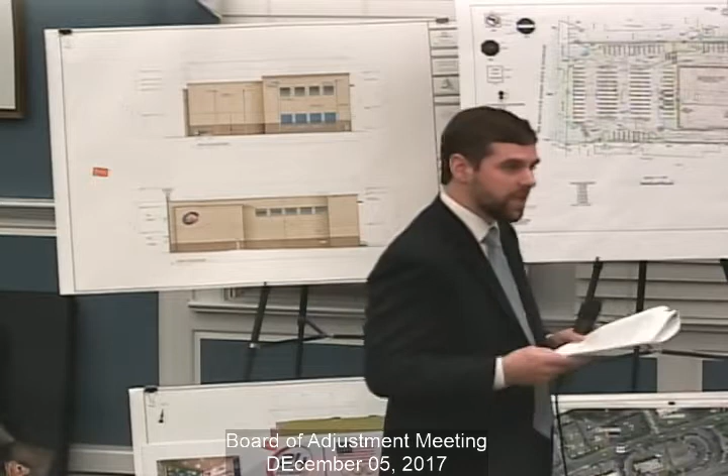We're redeveloping the site that was a former motel. It's in a blighted condition, it's underutilized. I think we can all agree this is a much better use of the property than the motel that was there before. We're proposing a modern building, very nice modern architecture.

The building is set back, as was testified, over almost 200 feet from the road. So you really don't get the effect of a taller building because it's set back so far. It really mitigates that impact of the taller building.

You heard testimony at the September meeting that the building height was really necessary for the basketball court and the swimming pool and all of the equipment that goes along with those facilities. So it was necessary to get that higher building height to fit those facilities in the building.

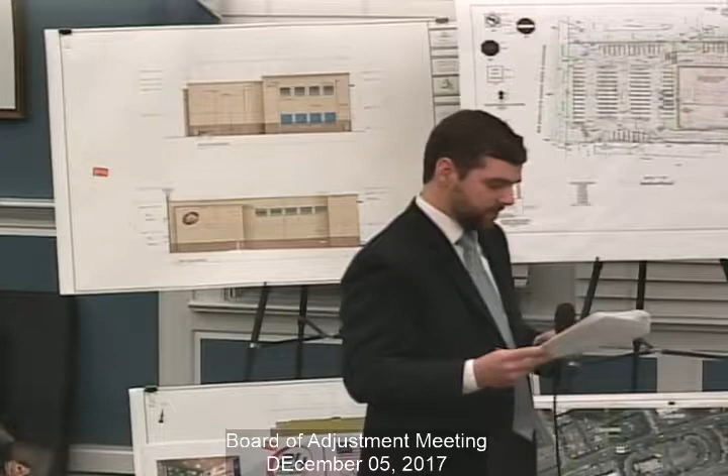We are requesting another variance for the parapet height, and I'll get into that in a little bit, but it makes the building look taller than it actually is, just because of that parapet in the front.

As far as the substantial impairment of the zone plan and the zone ordinance, the proposed use is consistent with the zone plan for the highway commercial zone. It's a permitted use. It fits in well with the adjacent properties.

Again, we're redeveloping a former use that's a blighting condition on the property, and will contribute to the tax base of the township.

The proposed building height does not increase the intensity of the use, just the floor to ceiling height inside the building. We're still providing adequate, suitable light and air and open space on the property.

The proposed use improves the visual aesthetics of the property compared to what's there. And we...

Would be consistent with several purposes of the master plan and the municipal land use law. Specifically, goal number 3 of the land use plan states that the township should take advantage of redevelopment opportunities along the Route 22 corridor as new uses are proposed for underutilized sites, which we have that going on here.

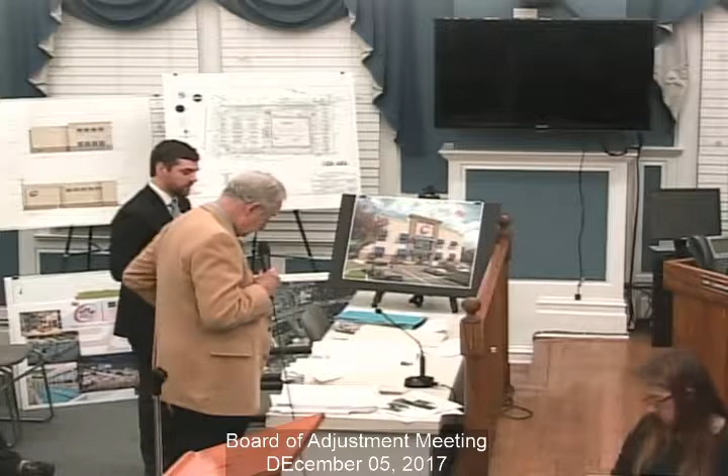We're requesting a number of C variances. The first is for lot coverage. The required coverage is 63%. The existing site is built at 70.3%, and we're proposing 88.3%. And that includes the building, all the parking areas, sidewalks, et cetera.

You heard the engineer testify that the parking lot will be pervious pavement, which means that the water will be allowed to infiltrate through the pavement into the ground. So that's really a benefit and offsets the request for the variance, mitigates any potential negative impact.

The second C variance is for the number of parking spaces, where 261 spaces are required. We're proposing 135 on this property, and we're requesting a shared parking situation to allow for overflow parking on the adjacent property.

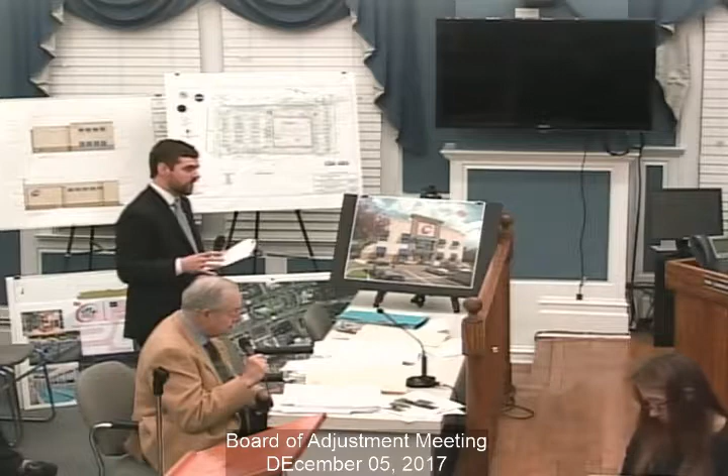We've heard testimony that there would be adequate parking at the peak times for the various uses. This is a good opportunity to provide a shared parking across the properties. Whenever you have an opportunity to have shared parking and cross access, it's really supported in planning principles. This is really a smart growth principle to provide cross access and cross parking.

You can see on the exhibit, it's A9. This is an aerial photo of the area, taken in 2015 by the state of New Jersey. You can see there's a lot of parking in this area for all the different uses. It's really a benefit to the town wherever you can reduce the amount of parking fields you have by allowing uses with different operating times to share parking, to really reduce the amount of coverage you have throughout the town.

The next variance that we're requesting is regarding the parapet wall. There's a section of the ordinance that allows parapet walls to be no more than 4 feet in height. This particular building, the highest point of the parapet is about 14 feet in the front. It steps down to about 7, 5, and then 2. So it's a variable height of the parapet wall.

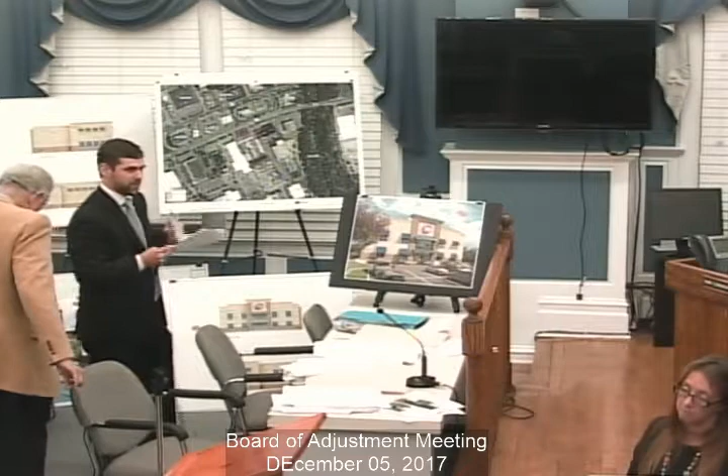This was done for screening of the rooftop equipment, the HVAC equipment, and some other equipment that's up there. And also, for the visual aesthetics of the building, to make it look nicer. Then we have 4 variances regarding the signs.

One variance is for the number of wall signs. We have 3 proposed wall signs where only 1 is allowed. We're requesting 1 on the front and 1 on each of the sides so that pedestrians and vehicles can navigate the site from Route 22 and from other parking areas on adjacent sites. That's the intent of the additional signs. You've heard testimony that we believe the signs will be useful to provide wayfinding into the property from Route 22 and from other properties.

One of the variances for the wall signs is for the height. The maximum is 5 feet and we're proposing 12 feet. As you can see on exhibits A3 and A4, the wall signs are really in scale with the building. They don't look overly large compared to the building, even though they're larger than allowed by the ordinance. I think once it's built, it'll really fit in with the building.

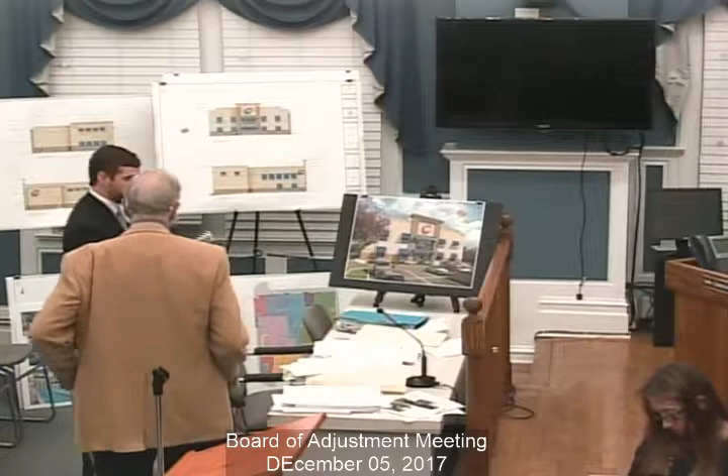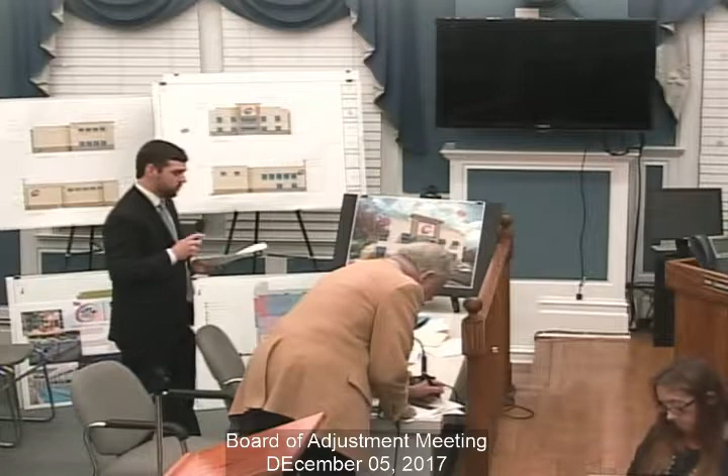Then 2 variances are for the freestanding sign. We are requesting a 196 square foot sign, 14 by 14. What the ordinance allows is 75 square feet, which is rather small for a major highway like this. I don't think you'll see many 75 square foot signs when you're traveling at 55, 60 miles an hour down this road. As you saw on exhibit A8, it's actually smaller than the existing motel sign and the 24-hour fitness sign built on the neighboring property. So I don't believe there's any substantial detriment from that sign. I think this is needed to provide adequate notice for travelers to see the site and make the safe turn in.

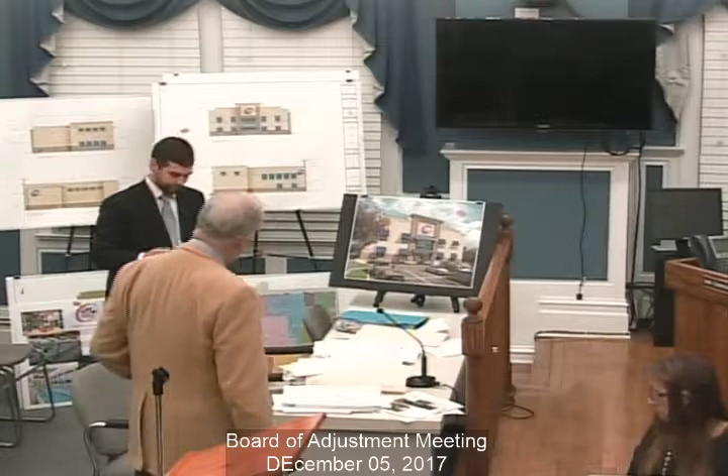So essentially, I don't believe there's any substantial detriment from any of these C variances. I believe we're promoting the purposes of the municipal land use law, and they essentially result in a better plan for the property than if we were required to comply with the ordinance. I have nothing further.

Can you put the board back up that shows the aerial photo, please? Sure.

This is an older one, but I just want to understand the way the flow of this parking works. On the right is where the daycare center is now, on the bottom, sort of adjacent to Diamond Road. Yes, right on Diamond Road. And the traffic is going to move from the 24-hour fitness to the east side, down into this area. Where's the front of that building? It's on Diamond Road, the property on Lot 9. That's Lot 8. Yes, it's on the other side, on the east side.

Paul, show them the building we demolished on Lot 8. This was a 30,000 square foot office building with an elevator. That's the front part, where we're putting the 13,000 square foot building. We eliminated 30,000, we're putting in 13. We originally were going to renovate it, but when we started, it didn't work, you'd still just have an old building with a new look. So we demolished the whole building.